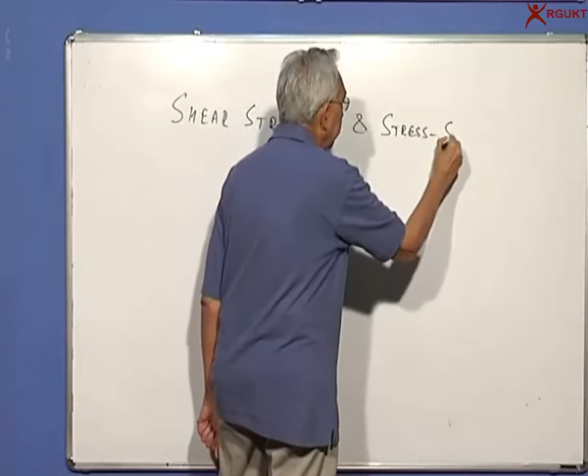and stress, strain, pore pressure response using triaxial testing, wherein a sample is confined laterally and we study the conditions under three types of tests: drained, consolidated undrained, and undrained condition, depending on whether you allow drainage or close the valve.

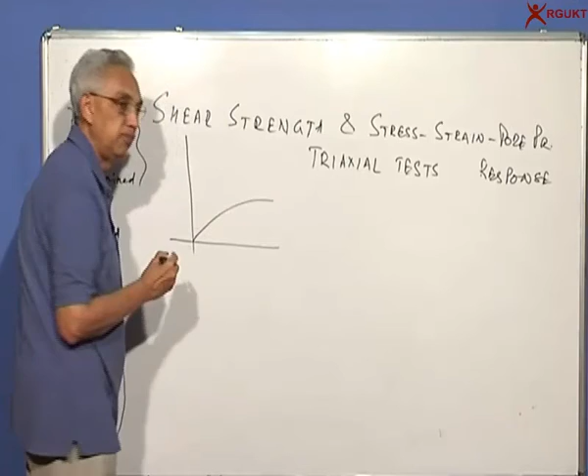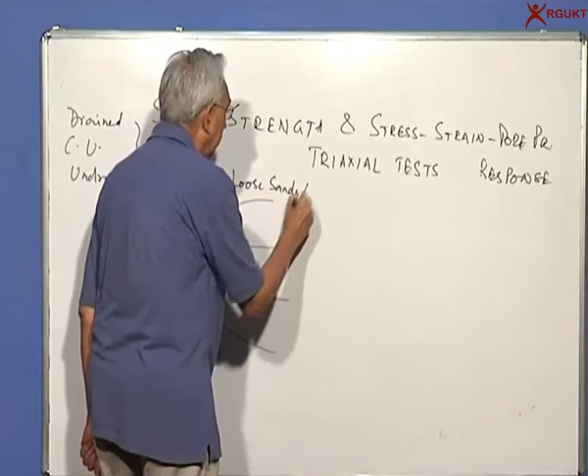The most important thing you should know is when you look at stress strain behavior, loose sands and soft clays have large deformations before they reach failure. And if you allow drainage, the volume changes, volume decreases. This is for loose sands or normally consolidated soils.

Whereas if you have dense sands or over consolidated clays, what you find is a maximum value and an ultimate value, or residual - this is also called residual strength.

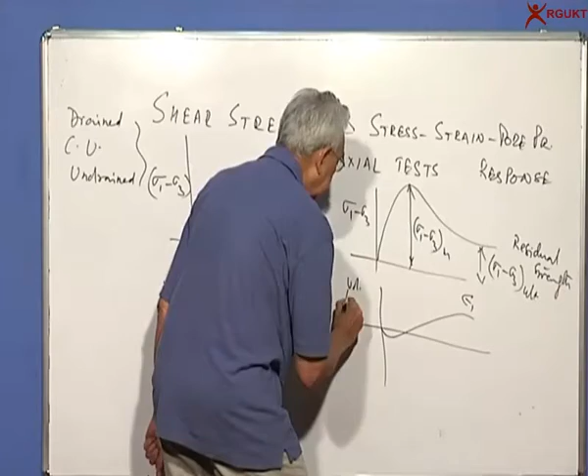And the most interesting thing would be if you allow volume change, this will be volume increase. And again, you are plotting with epsilon 1, the volume increases. So for different intermediate states, the behavior would be between these two.

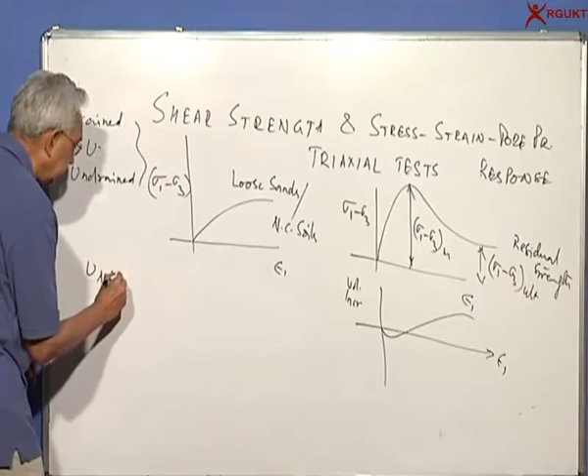If you do undrained test, the exact opposite happens. This is in the case of a drained test. If I do undrained test, what you find here is a positive pore pressure, whereas here, in case of

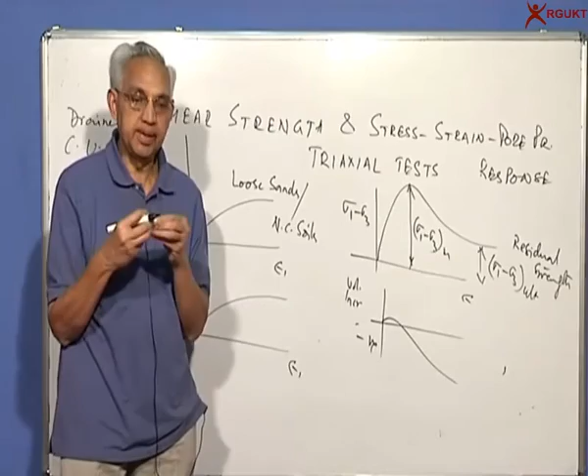dense soils, over consolidated soils, saturated ones, you will find the pore pressure can be negative. The soil has a tendency to expand, but since we close the valve, no water can enter, so whatever water is inside will be under tension or negative pore pressure. You may call it suction, but basically it is negative pore pressure, because of which it will have relatively high strength.

The other important aspect is, in nature, soils can be very, very soft. So we have what we call soft soils. They are all along the coast. If I have the coast of Andhra Pradesh here, you will see that right from Nellore, Krishnapatnam up to Srikakulam, we have soft soils. There can be clayey silts,

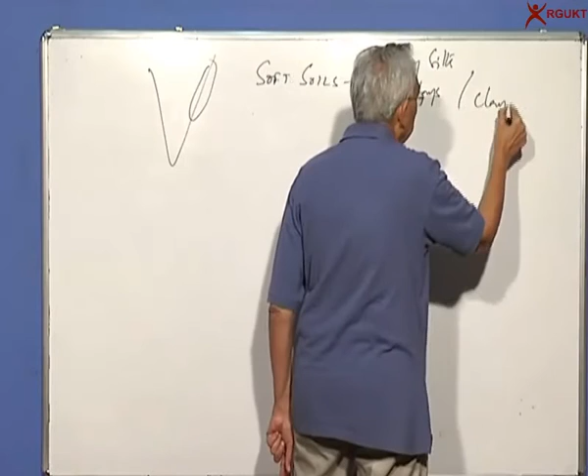silty clays, or predominantly clays. We call them marine clays because they have been deposited in the sea by all the rivers that are reaching the sea. It could be Krishna Godavari Delta, it could be Vamsadhara, it could be Pennar, whatever it is. So you find that all our ports are affected by these soils.

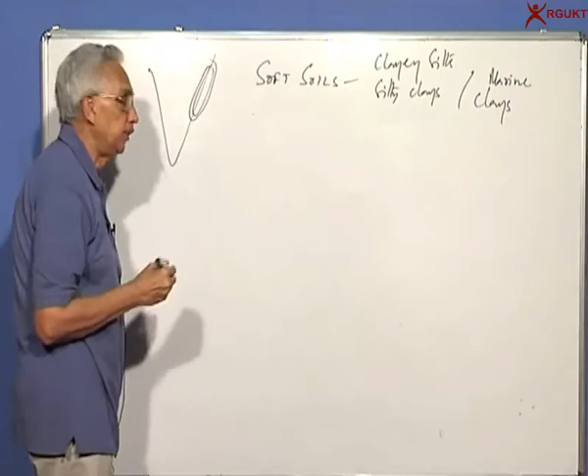If the soil is soft, you cannot easily get a sample. Remember, to do triaxial testing, you need a sample which is 37.5 millimeters in diameter and about 75 millimeters high. To take it off the ground from some depth, it's not easy. The soil may be so soft it may try to fall down.

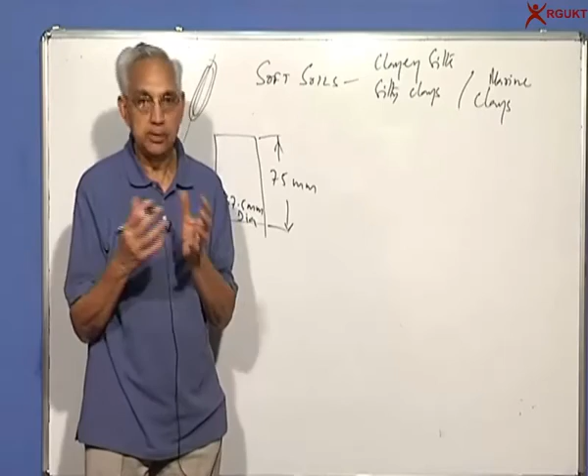So we had to determine the strength in the ground itself. And in the lab, if you want to do it, we don't take it out of the tube, but try to do it inside the tube, sampling tube itself. So to determine the strength of soft soils, we have what is called a vane shear test, which was developed some time back and is a very simple, powerful technique.

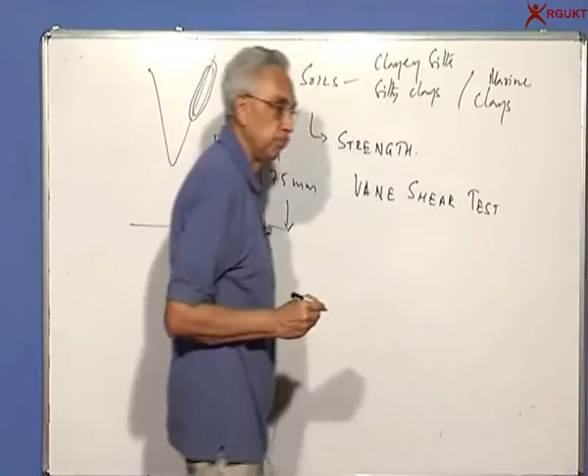What we have is a rod to which we connect two blades. This is one set of blades, this is another set of blades, and at the top you have a handle, so that I can rotate the handle and we push this inside into the ground.

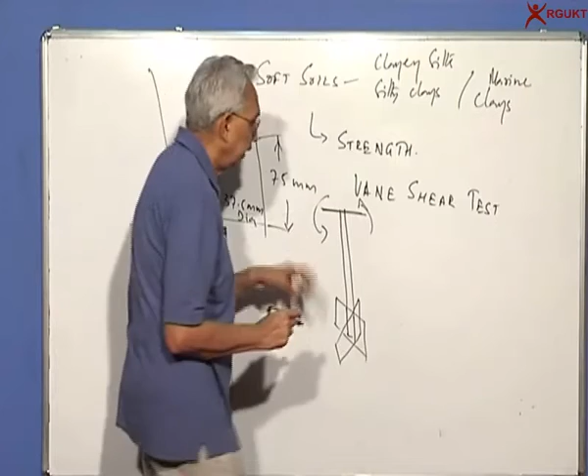If you look at the plan, you will see there is a rod, you have a vane, two sets of blades. So if you can imagine, to this rod, you have one set of blades here, another set of blades. So when I twist this, you will find that the soil within the blades gets sheared.

So what we do is, we push it into the ground. Let us say the ground level is here, and we make a hole, say 2.5 meters. I push the vane here and try to rotate it.

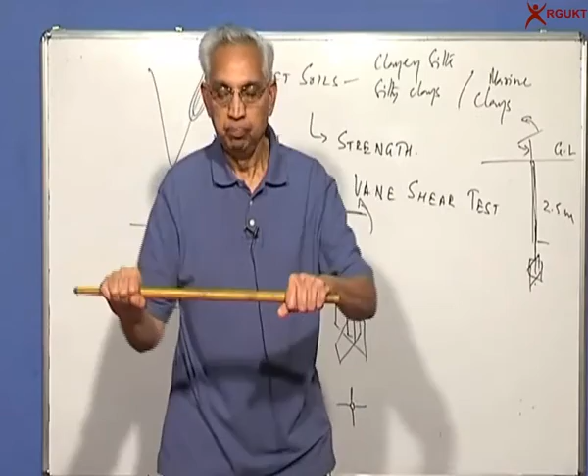So it is simply like you would have seen one of these car jacks at the top. We hold it and then rotate it. So you are applying a torque. This is a torque which is applied to the rod.

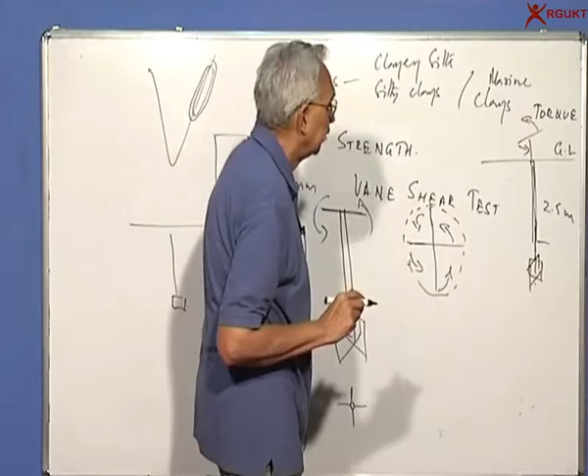When you apply the torque to the rod, these blades which are inside the ground, they try to move, and then you will get a cylinder of soil being sheared. So when you look at this, what you will find is you have the rod here and the vanes. So you will get the soil being sheared at the top and bottom and all along.

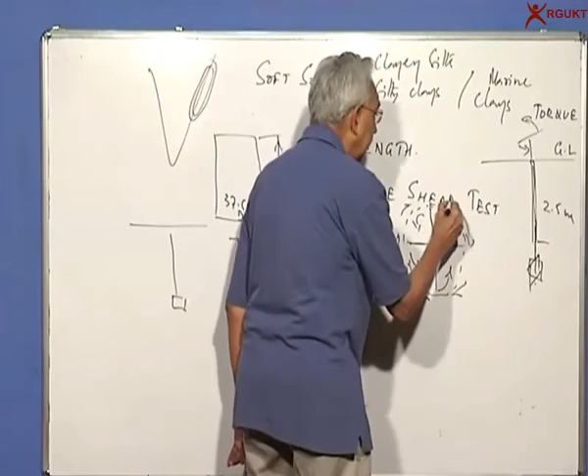So when I am shearing it, the soil develops shear resistance, and these are all soft clays, and we do the test in a very short time, which means probably each test is finished in about 5 to 10 minutes.

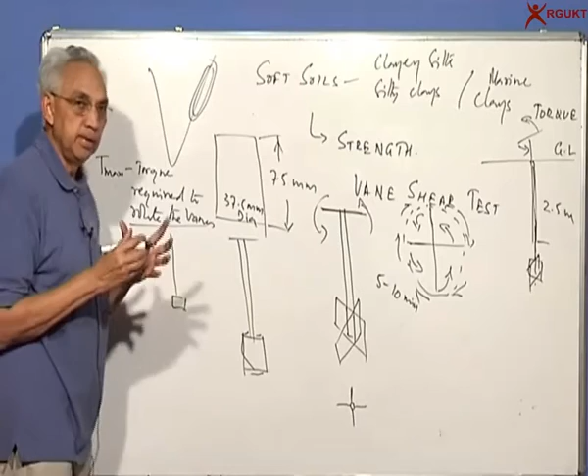The vane is given at least 1 or 2 rotations per minute, so you are turning it fairly fast. Then you measure how much torque is needed to twist it and get the maximum strength. So T max is the torque required to rotate the vanes, which gives the maximum torque, depending on the strength. How do I find out?

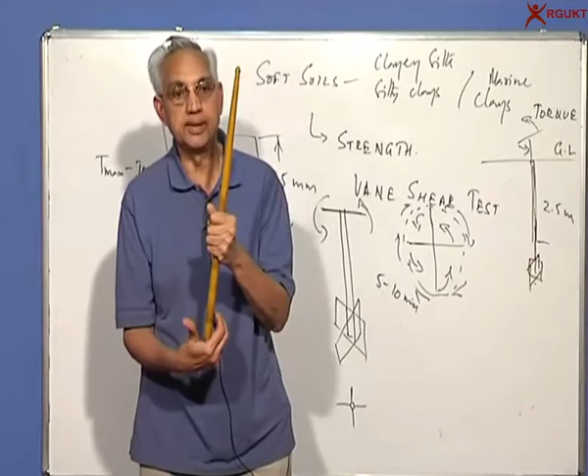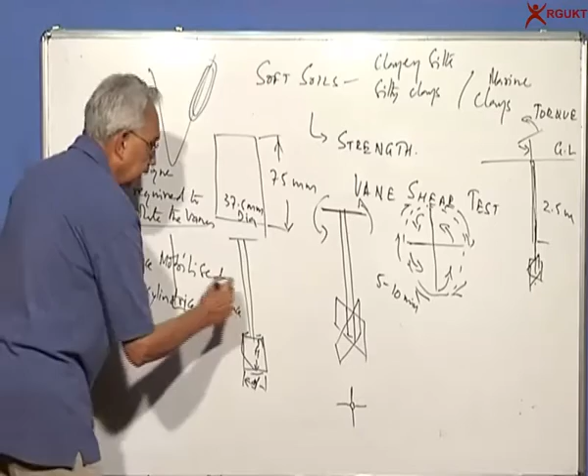You agree that this is height h and the diameter is small d. So when you rotate this cylinder, you get shear resistance mobilized along the cylindrical surface, and you are finding out torque, which is the moment about the center. Whatever torque resistance moment is about the vertical axis, plus the flat surface here also gets sheared at the top and bottom. So the torque is due to resistance mobilized

along the cylindrical surface, the soil contained within these blades. This is the diameter d, and over the height of the vane, which is equal to h. So that is the cylinder we have, and that cylinder moves inside the soil. So we get T is equal to the torque.

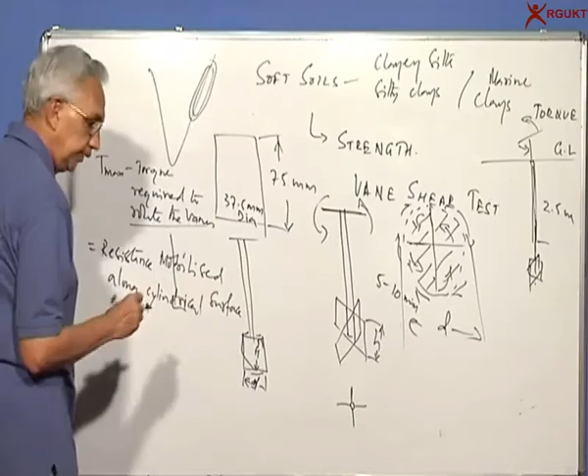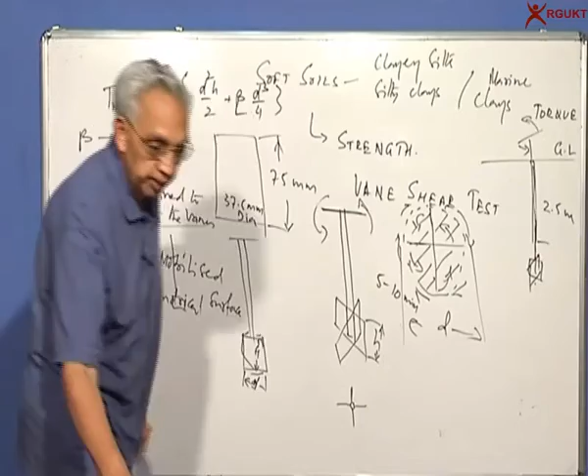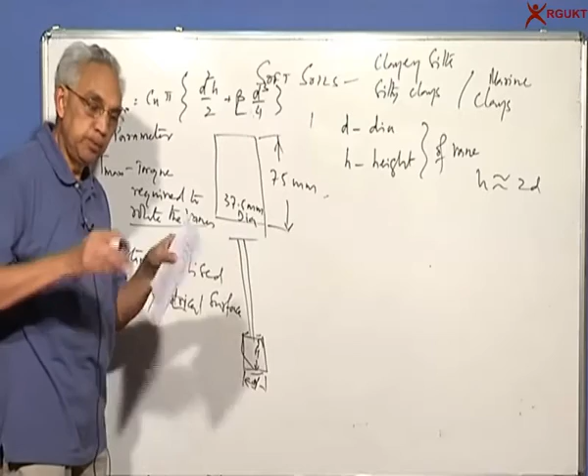So the first part is the torque mobilized due to strength on the cylindrical surface, and the second part is the strength mobilized on the top and bottom surfaces of the cylinder, because you are pushing the vane into the ground, so the top and the bottom of the vane are within the soil.

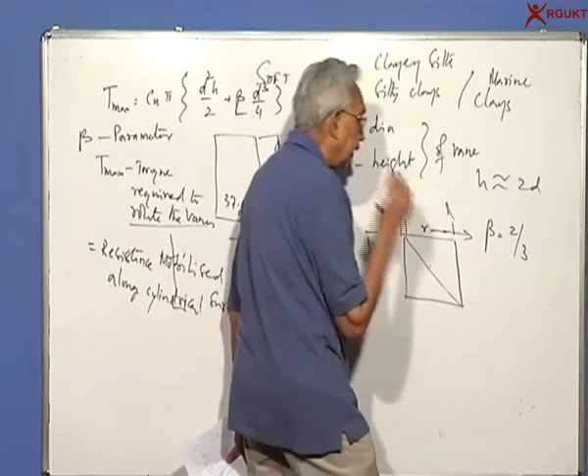This beta is a parameter that tells us - suppose this is the rod and the vanes are being rotated - if the strength is fully mobilized, this is R, the radial distance from the center. If the strength is fully mobilized, then beta is equal to 2/3. Whereas if you say the strength cannot be mobilized at the center and is linearly mobilized, then beta is equal to 0.5. Whereas if you say it may be parabolic, something like this, then beta is equal to 0.6. But usually we take this as our simple assumption.

So you will get beta is equal to 2/3, meaning it will be d cubed by 6. So T max is equal to Cu pi d square h by 2 plus d cubed by 6, assuming the strength is mobilized all along uniformly. So the soil goes into an undrained state - please remember, we are using Cu, which means it is called undrained cohesion.

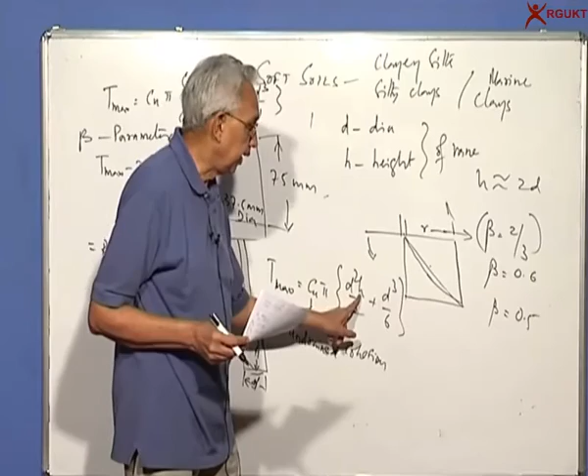So if I know the torque, the maximum torque required to rotate the vane inside the ground by 1 or 2 revolutions, or even half a revolution: Cu into pi, square of the diameter into the height of the vane by 2, plus diameter cubed by 6. So now you can easily calculate Cu, which is equal to T max, maximum torque, by pi d square h by 2 plus beta into d cubed by 4. And you can apply whatever beta you think is appropriate to the condition.

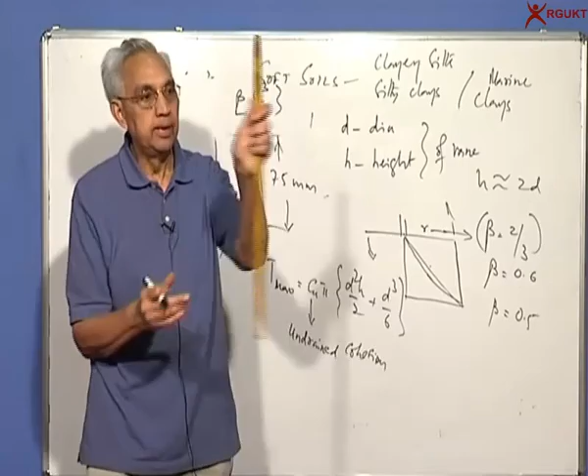So here is a very simple technique: all that you do is push the rod with the vane, rotate it, and find out the torque, and you will get the undrained strength.

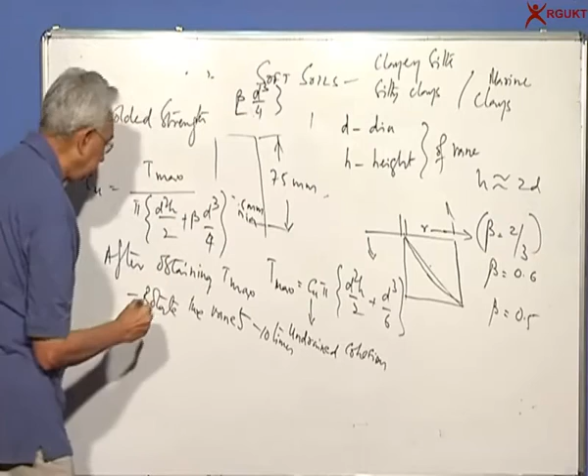We do something else after that. After obtaining T max, the maximum torque, rotate the vane about 5 to 10 times. So what you do is push it in again, and then using the torque wrench, we keep doing this, and you will find you are disturbing the soil, getting what is called remolded strength. You try to find T remolded. We have completely churned the soil, so it has become highly disturbed, and if it is highly disturbed, you get remolded strength, which is much smaller.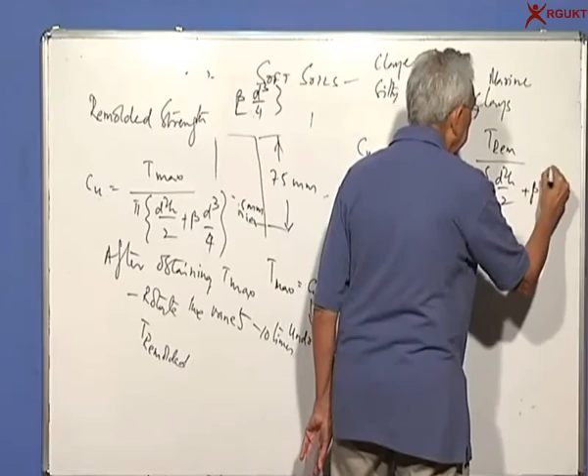So once you get T remolded, I can get Cu disturbed or remolded: Cu remolded is equal to T remolded by pi d square h by 2 plus beta into d cubed by 4. Note two things you find.

First time when I give a slow rotation for maybe half a rotation or one rotation, I get a very high torque. So if I plot theta versus t, I get a maximum value, T max. If I increase theta, it will reduce, and you will get T remolded. That's the same thing as our triaxial test, wherein you get the maximum strength and the ultimate or yield strength or highly disturbed strength. So from the field, we can determine both the maximum torque and the remolded torque, from which we will get Cu, undrained cohesion, and the remolded value.

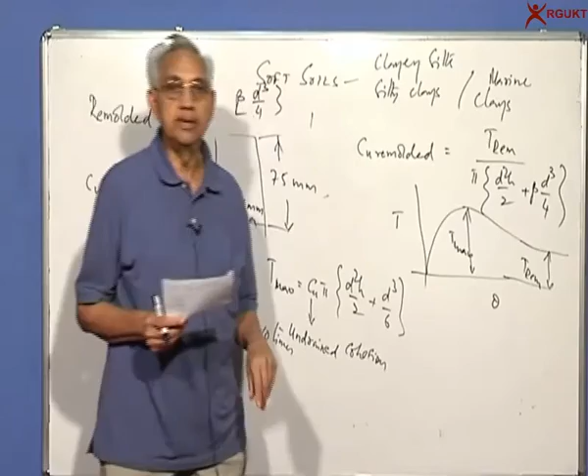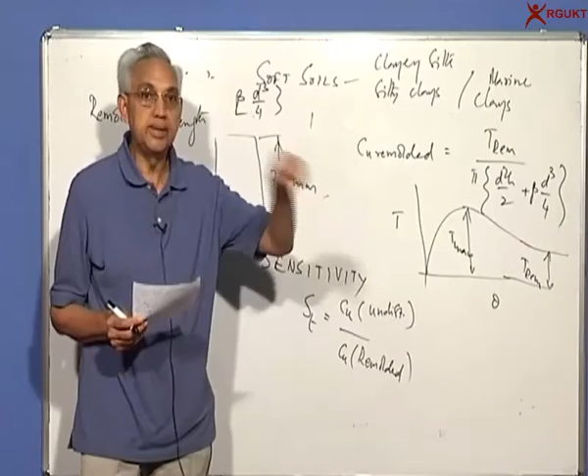Why do we need this? Because you can now define a new term called sensitivity. Symbol is St. We say Cu undisturbed divided by Cu remolded. If you can do the test without disturbing the soil, you will get undisturbed strength, which is relatively high. And if you find out the undrained strength after remolding the soil, you get remolded undrained strength. And that ratio is called sensitivity. And this value can vary from 1 to even 100 or more. Imagine if the sensitivity is 100, it means if you disturb the soil the strength reduces to 1/100th.

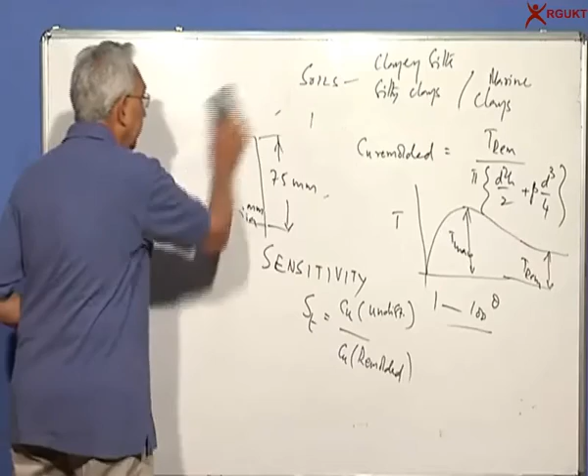Fortunately, in our state and in India, we don't have too sensitive soils. For example, if you test Visakhapatnam clays, Kakinada, Srikakulam, etc., sensitivity is only of the order of 2 to maybe 6. So if you disturb the soil, the strength may reduce, because the undrained remolded strength will be a fraction of the undisturbed strength, which means when you do construction in these soils, you have to try to maintain as close to the undisturbed state as possible. The moment you disturb it, the soil will lose strength.

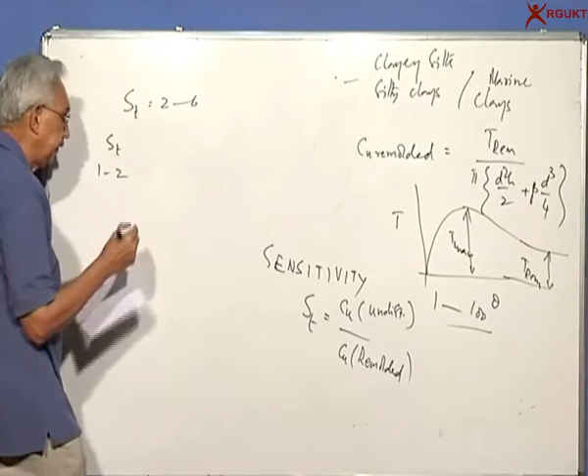Here we have a table. If the sensitivity is 1 to 2, we use the term slightly sensitive, 2 to 4 medium sensitive, 4 to 8 is very sensitive. And the moment it goes beyond that, these are called quick clays. Then 8 to 16 is called slightly quick. Imagine, 16 to 32 is medium quick, 32 to 64 is very quick, and anything more than that is called extra very quick clays.

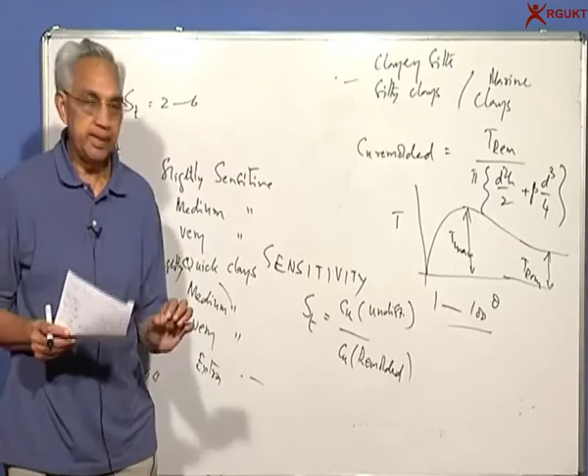Why do we call it quick clays? The problem with them is the moment you touch them, even a slight disturbance makes them collapse and it starts flowing like a liquid. Whereas fortunately for us, they reduce only by a factor of 2, 3, 4. Maybe on the west coast near Bombay, Cochin, there may be a sensitivity of the order of 4 to 6.

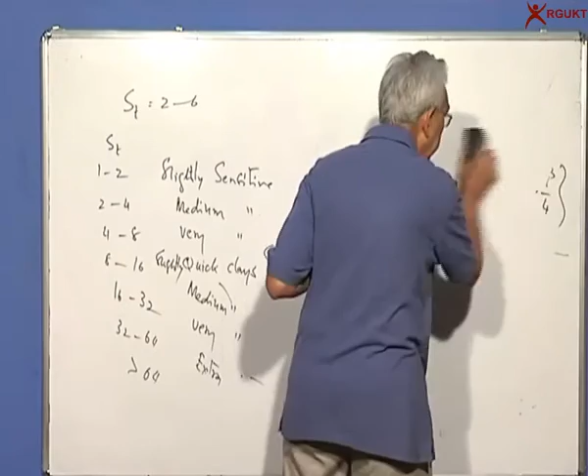I'll give a simple example. I want to drive a pile in Visakhapatnam port, and if I try to drive a solid tube, the moment the soil is disturbed here, the soil here becomes very, very soft and it cannot take any more load. So we never do that kind of thing. We recommend a bored pile so that the soil gets least disturbed. So I drive a small thin tube, remove the soil rather than pushing it laterally.

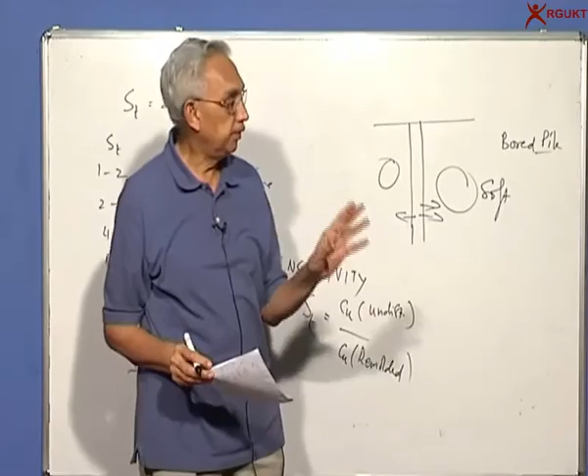So when you have soft clays, you have to be extra careful not to disturb them, so that if they lose strength, you can't construct anything on top. Or the cost of construction goes up, the whole thing starts flowing in. There was an excavation made in one of the sites, and because of the disturbance, the whole soil flowed into the excavation, and we had a lot of problems because it was not taken care of properly. So sensitive soils are very, very difficult to deal with.

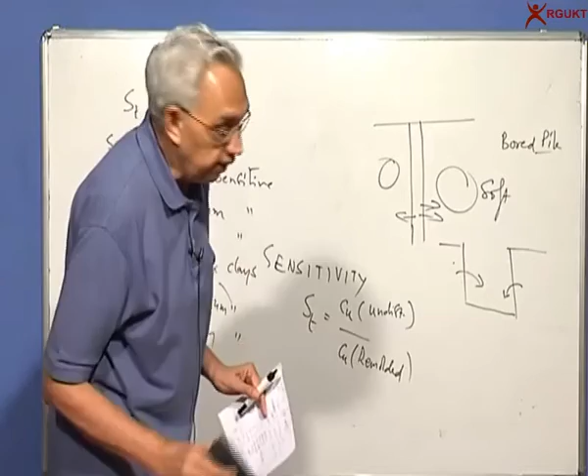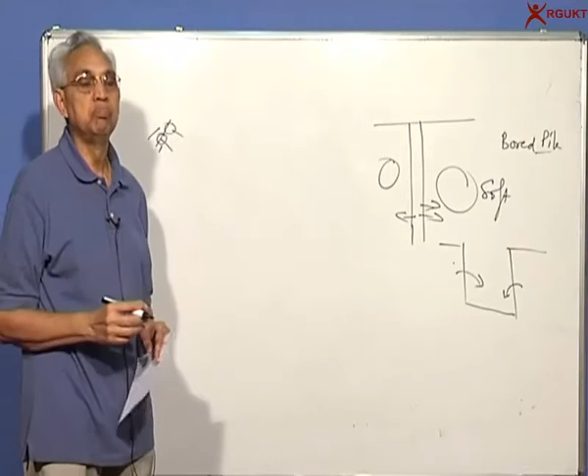The reason why they are sensitive is because they have been deposited under the sea, which means under sodium chloride conditions, and then the whole thing got leached, and instead of a chemical, now you have water. And because of that, the particles become very, very weak at the joints. If you disturb it, the interparticle forces get lost and the soil collapses.

Another advantage with the vane test is that I can determine the strength at different depths. So if I plot Cu as a function of depth, what you find is initially it may decrease, but generally the strength increases with depth. The reason is the soil is the same. It's a homogeneous deposit.

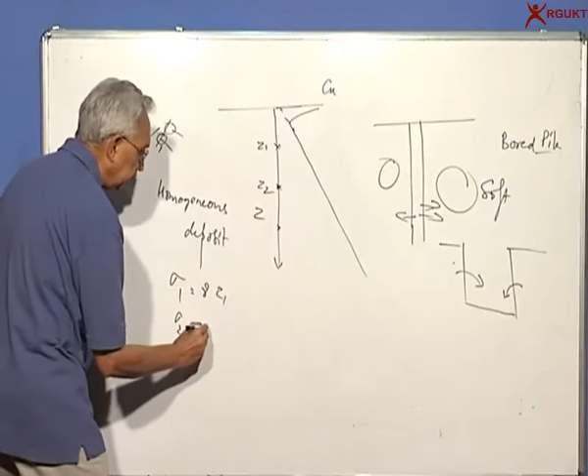So materially it's the same. But if I look at a point here and here, depth is Z1, Z2, you agree that the total stress sigma 1 is gamma into Z1, sigma 2 is gamma into Z2, and then sigma 1 prime is equal to gamma Z1 minus gamma W Z1, let's say the water table is close to the ground level, and sigma 2 prime is again gamma Z2 minus gamma W Z2. Sigma 2 prime is greater than sigma 1 prime. The effective stress as you go deeper is increasing.

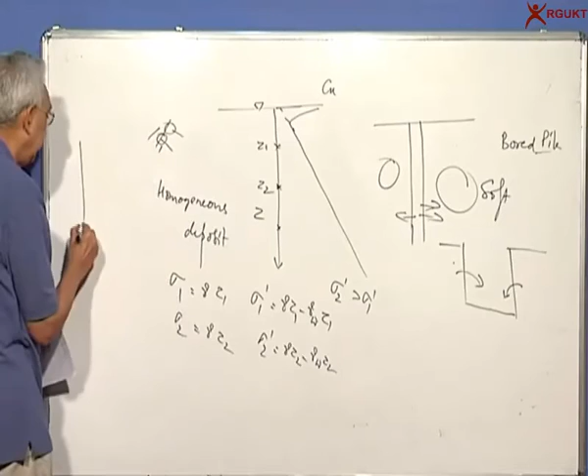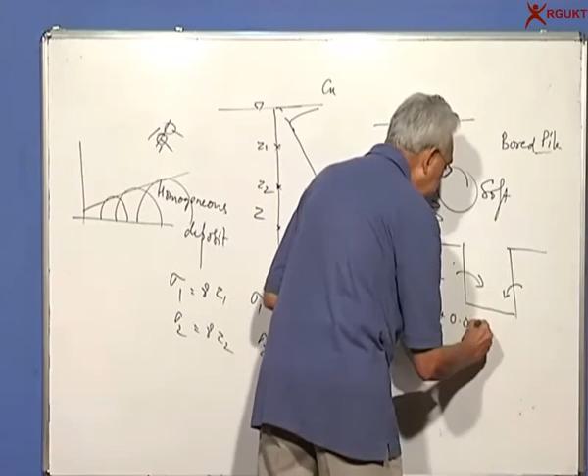If the effective stress is more, you have seen in your consolidated undrained test, you get the highest strength. So what we find is Cu by sigma prime is a constant. It increases linearly, and this constant is given by Skempton way back in the 1950s. We may have to modify it for our own soils, plus 0.0037 into plasticity index. The more plastic the soil, if PI is more, the increase is more. Usually I would say this is approximately around 0.23 to 0.25. The undrained strength is about a quarter of the effective vertical stress at that depth.

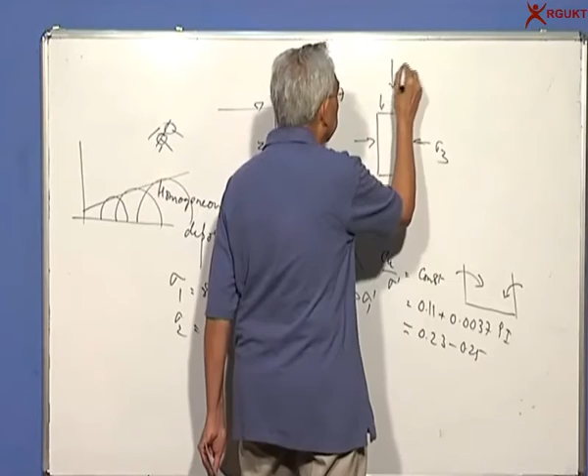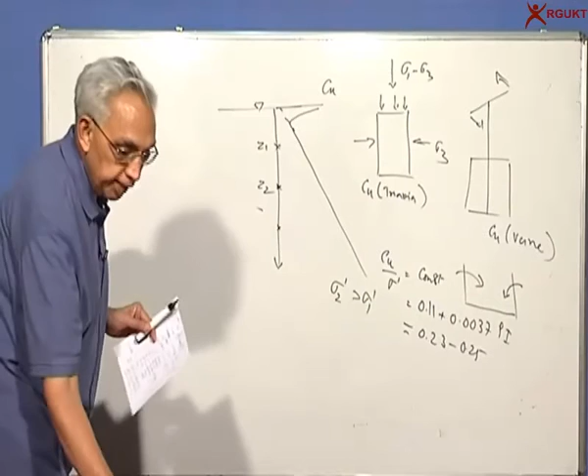The second thing you should know is to correct for the vane strength. How is the strength determined in a triaxial test? We have sigma 3 and we have a deviatoric stress. Whereas in the vane, you are applying a torque and shearing in a different way. So if I want to find out Cu from triaxial and you have Cu from vane, they may not be the same because there are two different types of tests, and so we have what is called a correction factor. So if you determine Cu from vane, the Cu that you should adopt for design, which is more or less closer to triaxial, let's say for embankments, etc., is lambda times Cu vane. This undrained strength determined from the vane test has to be multiplied with the parameter lambda.

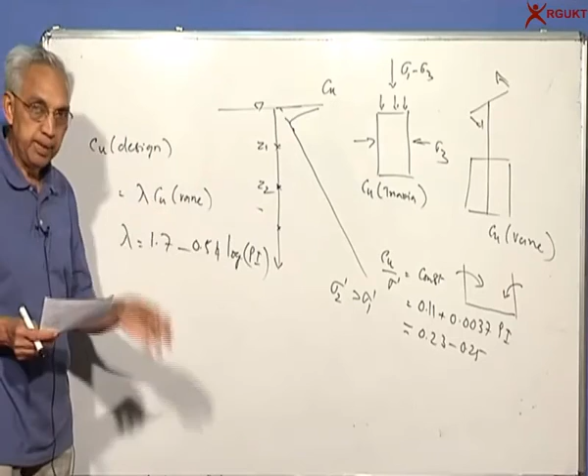And this lambda again is a function of the plasticity index. So all that you have to do is determine undrained strength from the vane test, multiply with the factor. This factor lambda is a function of plasticity index. And then you will get the appropriate one to use for our design. Could be a foundation, could be a pile, it could be an embankment, a liquid storage tank, whatever it is. Do not use directly the undrained strength you determine from the vane. Use a factor to get the corrected value. So please remember, this is absolutely necessary.

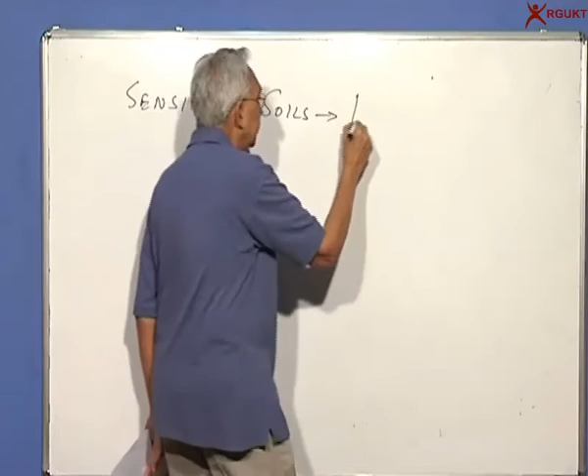So what we have found out from this is that soft soils can be easily tested to determine the strength, and this tool is used to determine strength at various depths. You make a borehole, push the vane, then conduct the test, then take the vane out, extend the borehole, repeat the whole process. Two other things are very important. One is, we said, sensitive soils. They lose strength due to disturbance. So the strength decreases. There is a phenomenon that occurs which is opposite. We call it thixotropy.

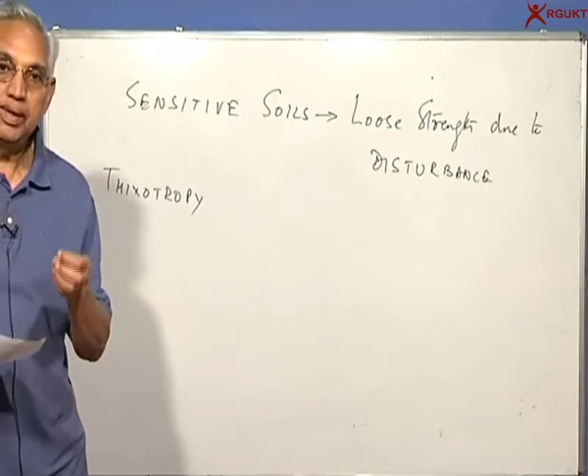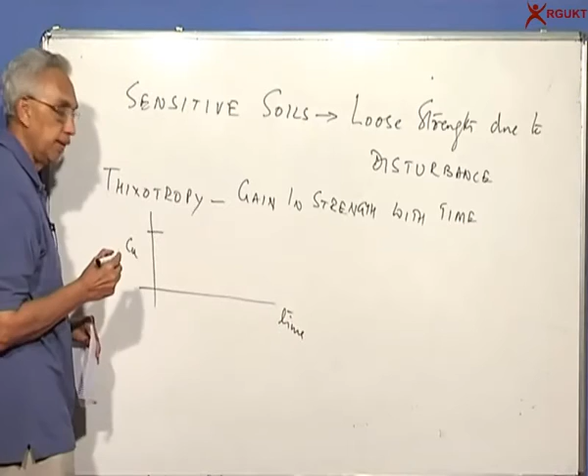I don't know whether you have noticed it. When your mother, sisters, whoever it is, make curd, initially to the milk you add a bit of culture, and after some time you find that the whole thing becomes semi-solid and sometimes fairly hard, and that is nothing but thixotropy. The same milk with the culture becomes harder. So thixotropy is gain in strength with time. So for example, I'm plotting Cu versus time. In the undisturbed state, the strength is high, but the moment you disturb it, it may become smaller, then it may gain. Again, if you disturb, it will come down and keeps on changing.

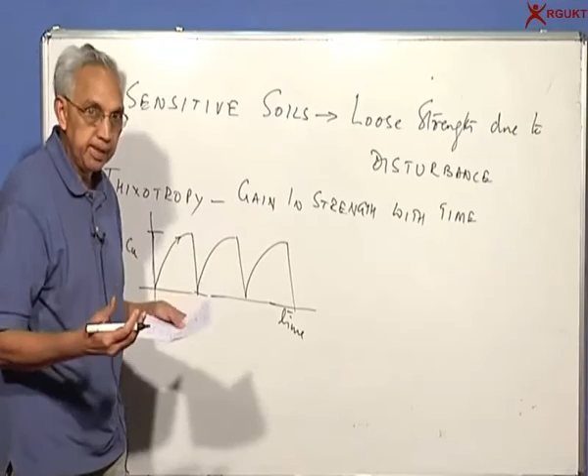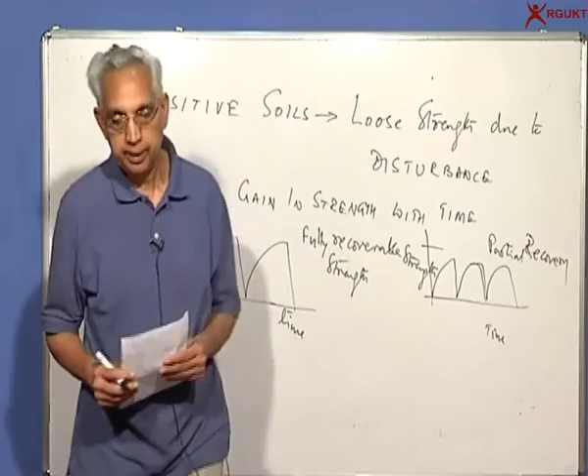And this gain in strength, I think it should be the other way. So you find that given time, some soils can regain their strength. Then these are called fully recoverable strength. Whereas some soils, it cannot be fully recovered. So I have strength versus time. Initially, let's say, strength is high, it comes down. This is partial recovery. So you have to also, if necessary, take care of the gain in strength over a period of time.

It can be 6 months, it can be 1 year. So if your project can wait, after we disturb the soil and wait, maybe the soil can gain 50%, 80% or 90% of the strength. So this is absolutely necessary, interesting to study, another unique feature of soft soils. Sometimes you also find in sands, if you vibrate, they may lose their strength, but over a period of time, they gain in strength. The third most important phenomenon with respect to strength is a particular process called liquefaction.

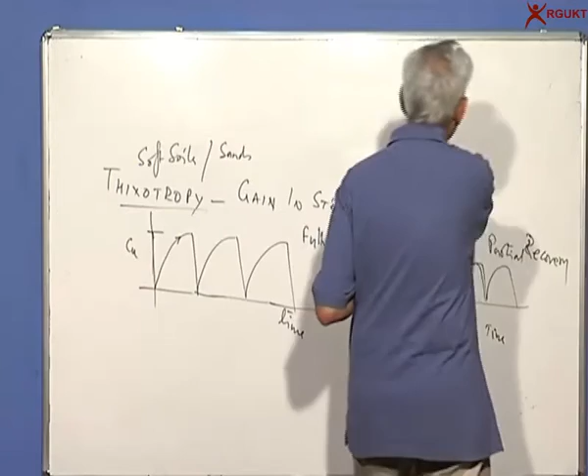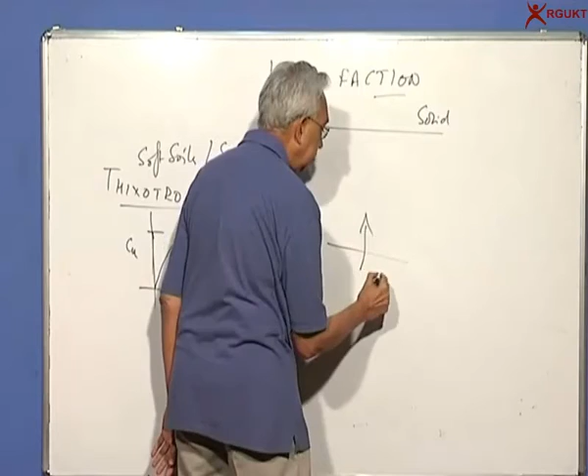This happens in sands. You might have seen some of these pictures of the Bhuj earthquake or any of the ones that were in Japan, etc., wherein a ground which looks solid, then an earthquake comes. Then you have the energy, like the Bhuj earthquake of 2001, magnitude of the earthquake is of the order of around 7. It's a fairly high intensity one, and if you have loose saturated sands, which means the groundwater table is somewhere high, it's a loose sand, which means the relative density is less than about 45 to 50%, usually 25 to say 35%.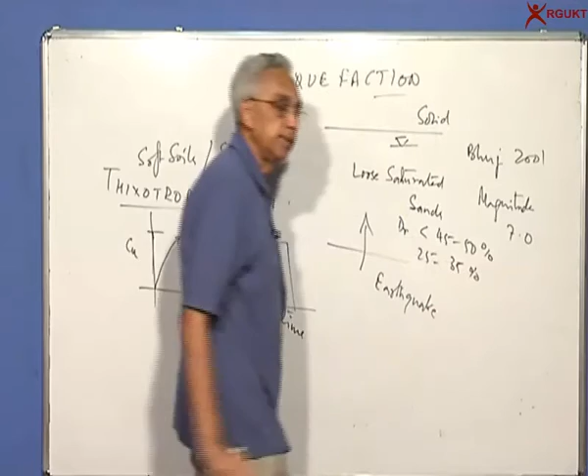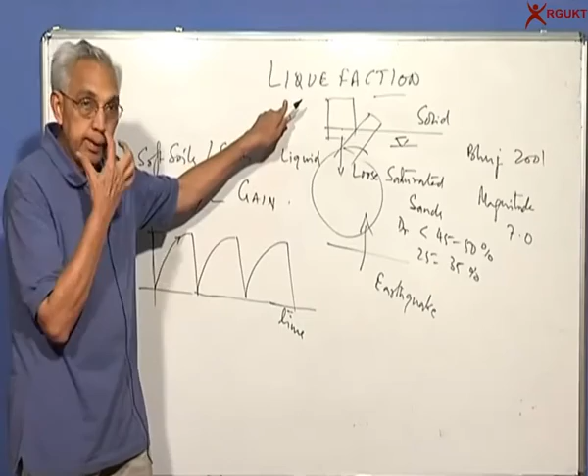You call it a loose sand, 15, 25, 30, 35, you call it. Suddenly under earthquake, the whole thing becomes a liquid. And anything you build on top, because it's a liquid, it will either try to sink, it will try to rotate, it will fall, collapse, all kinds of things can happen, which in fact happen because the soil below has become a liquid. So the process under which a good solid ground which looks normal under ordinary conditions during an earthquake becomes a liquid, and the process is called liquefaction.

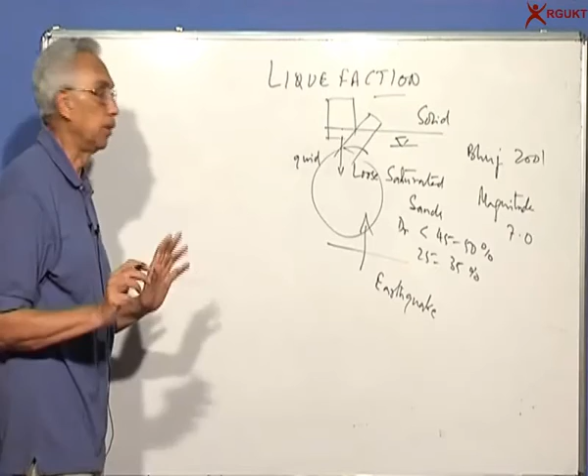Why does it happen? This happens only in case of sands. Even though the permeability is high, earthquakes occur over a very short period of time. Duration of earthquake is usually only of the order of 20 seconds. Now 20 seconds is not enough for the pore water pressure to dissipate. So I have a sand which is subjected to shaking, and it is saturated. So once you apply any shaking, the pore pressure increases.

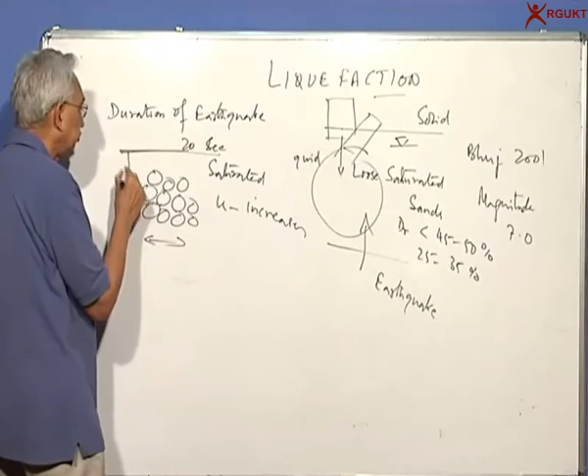And once pore pressure increases, please remember the total stress is the same. Sigma is gamma into Z. So the total stress remaining same, if U is increasing, sigma prime, the effective stress decreases. And if effective stress becomes 0, that means the pore pressure generated inside is equal to the total stress, the effective stress becomes 0. Once it is 0, the whole thing collapses.

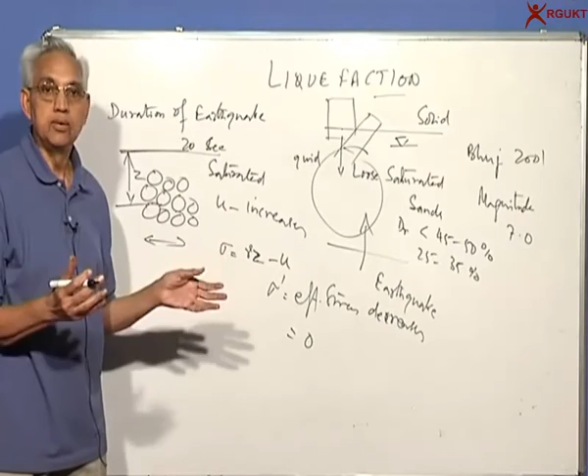So to do this, what we do is a cyclic triaxial test in which you apply on the sample this vertical load number of times. You apply, remove, it's a dynamic load till the soil gets liquefied. Count how many cycles you have to apply, and from there we try to determine whether the soil is likely to liquefy during a 20-second duration earthquake or longer. So cyclic triaxial test is necessary if you want to study liquefaction potential of most soils.

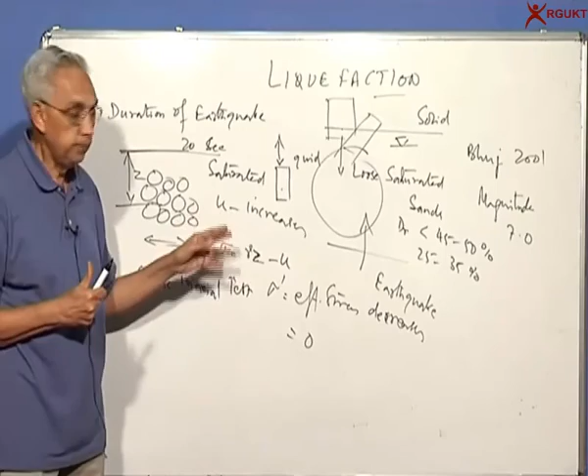Okay, so this is how we normally do the liquefaction. In the field, of course, we have separate tests. We can do a standard penetration test, a cone penetration test, etc., in order to determine the liquefaction potential. Those are in situ tests.

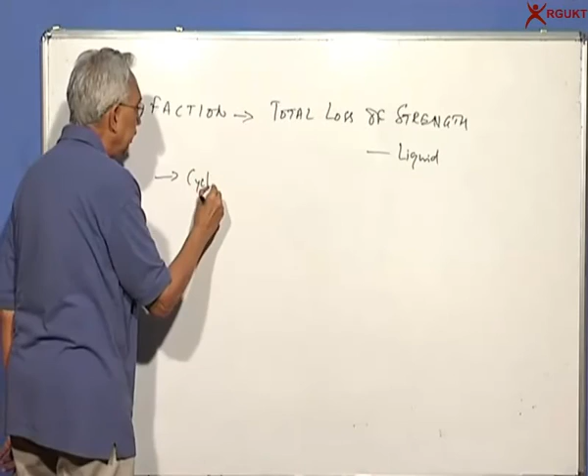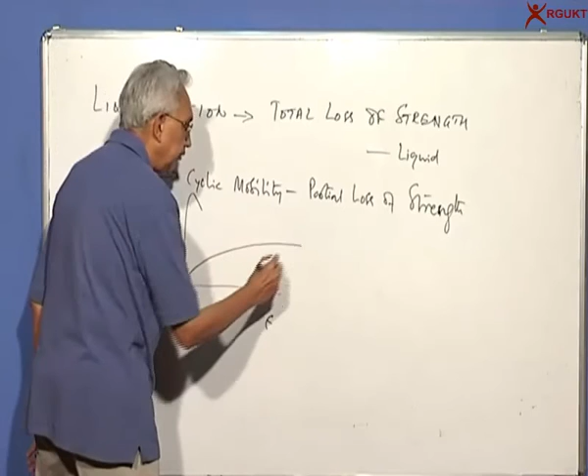The second thing that can happen is the liquefaction can lead to total loss of strength, and it behaves like a liquid, or we call it cyclic mobility when the strength is partial loss only. In this case, strength may reduce by 50 to 70%. Once it becomes so soft, say strain versus stress, original strength is here. Now it becomes and very large strains, which is also bad. The only thing is the structure may not collapse, whereas in this case it can collapse fully.

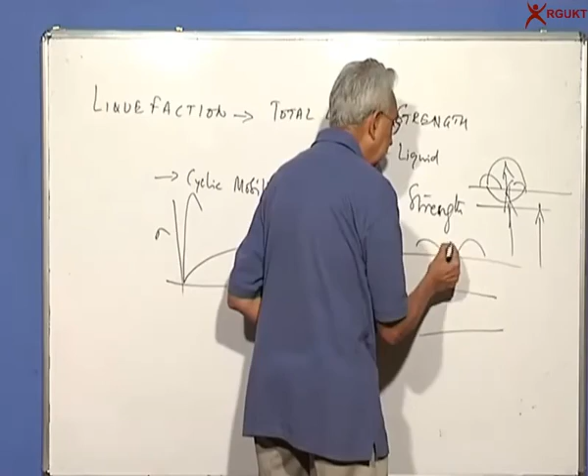Another very interesting thing you will find is suddenly you will find this saturated soil coming out like a fountain, and you will get these volcanic craters kind of thing here. The sand which is below is under such a liquefied state with high pore pressure, it comes like a jet and deposits on the surface. So you will find suddenly the sand which is below here comes out during an earthquake and gets deposited all around on the ground surface. I would like you to look into the internet. I'll try to show some pictures too, wherein you find that the sand which is below ground level has come out now.

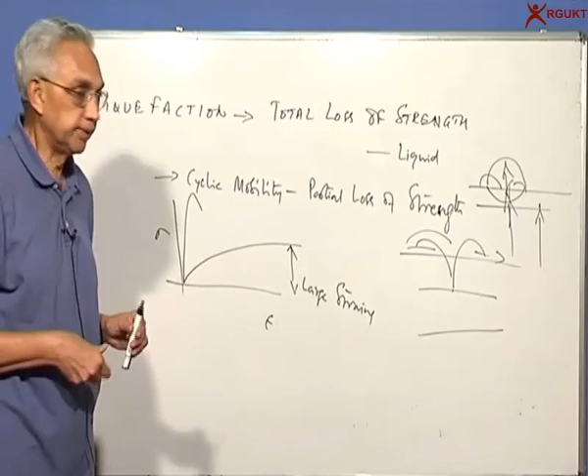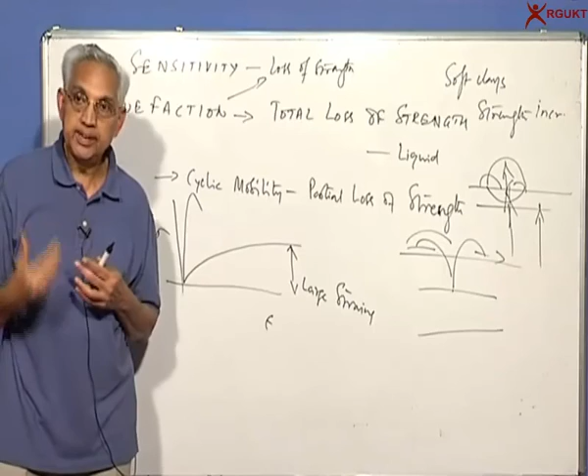So when you study strength, these are the various special exclusive characteristics of the soil. Soft clays with strength increasing with depth. Please remember, soft clays, strength increases with depth. Then sensitivity, loss of strength due to disturbance. And liquefaction is also something like that. The only thing is this disturbance is caused by nature itself and not by human activity. A major earthquake hits the place, and then that's enough to cause the liquefaction, because the energy released during an earthquake is very, very high. So please remember these.

Then there's a positive side of it. If you have time, soil gains its strength. Gain in strength is called thixotropy. So we need to study sensitivity, the liquefaction potential.

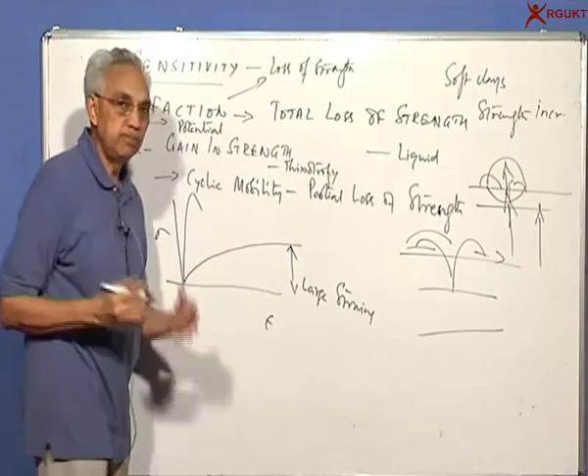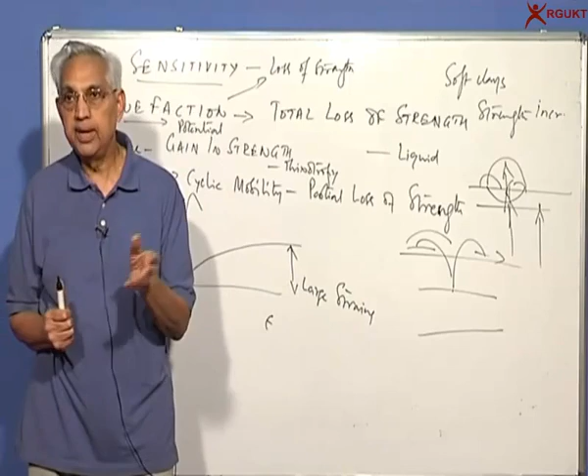But let me tell you, for smaller earthquakes of magnitude 6 or less, liquefaction is very unlikely. And particularly in this region, we are in zone 2 of the earthquake magnitude according to the Indian standard, where the maximum earthquake that can occur in coastal Andhra or say Vijayawada, etc., is only of the order of 4, 4.5, maximum 5. So we have very little chance of getting liquefaction. But if you do end up working in an area like Gujarat, in the Ganges Delta, Brahmaputra Valley, you may find that the liquefaction can be a serious problem. So this tries to complete our study of strength and stress strain behavior of the soil.